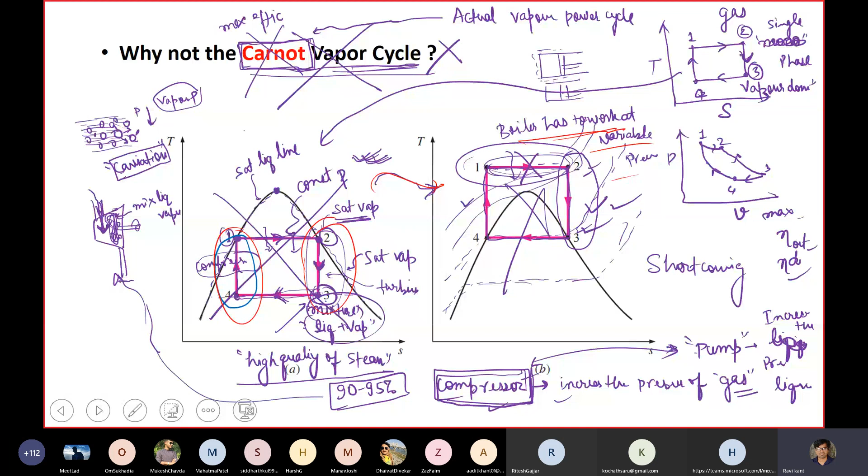So that's why we have left out the Carnot vapor cycle; it is not possible. It's not a real cycle that would be possible. So then we have come across that the ideal Rankine cycle would be the best solution to get the power output. And the only difference we saw from the gas power cycle is there is a substitution of the compressor with pumps.

Okay, one more thing: in the gas power cycle the compressor shaft is connected to the turbine shaft, and some of the power you are getting from the turbine shaft will be delivered back to run the compressor. So the back work ratio was quite high. In this case it was around 40 to 80%. In some cases 80% also we used to get.

But here we'll see, instead of this compressor, there are the usual heat exchanger, turbine, and then condenser. All sorts of things were there. So except this compressor, we have pumps now, and here slight work can also be used to run this pump as well. But here we will see that the back work ratio.

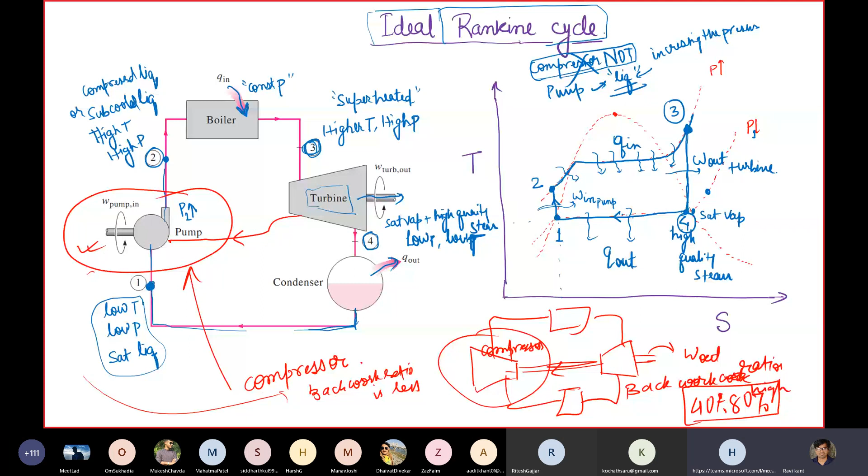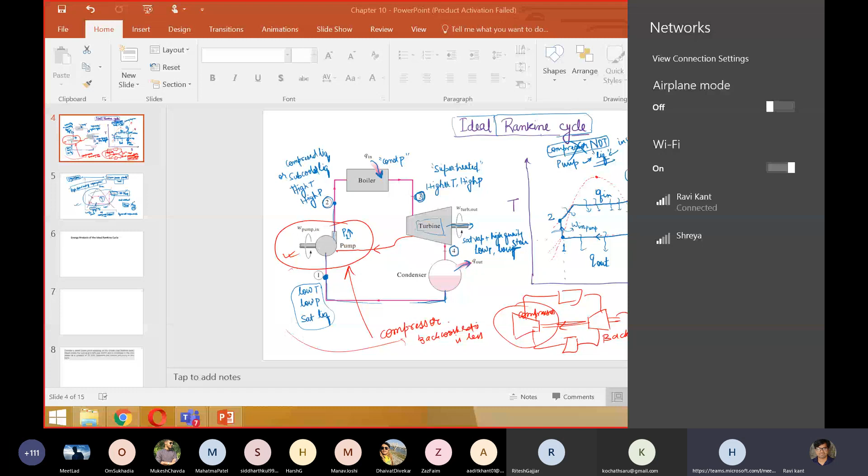Yes, just try to. Voice is breaking. Voice is breaking. Okay, yes, that is the problem. Okay. My voice is. Internet is okay. Is it from your end? Because from my end it's okay. Who is this? Probably it's from your end, because others didn't complain. David, audible enough, or is the voice cutting? Sir, you are audible, but this Microsoft Teams person is constantly getting unmuted, so the sound is getting disturbed. Okay. So I'll try to tell him. Okay, who is this guy? There is someone who has pasted a link. I can see that.

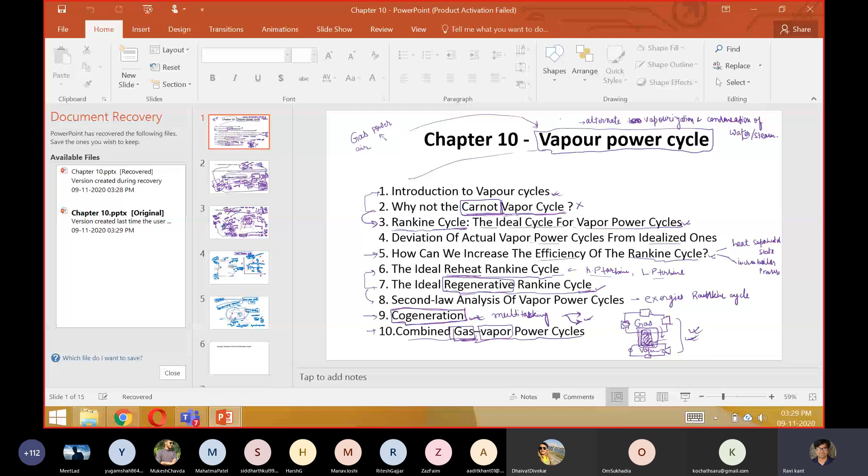Okay, somebody is in the lobby. Let me put them in. Okay, my Microsoft has stopped. The reason these lobbies are here is because the D2 students don't have PDP emails. So we will be facing some problem admitting them from the lobby to the meeting till they get their usual PDP email. Let's see. Let me open that. Okay, fine.

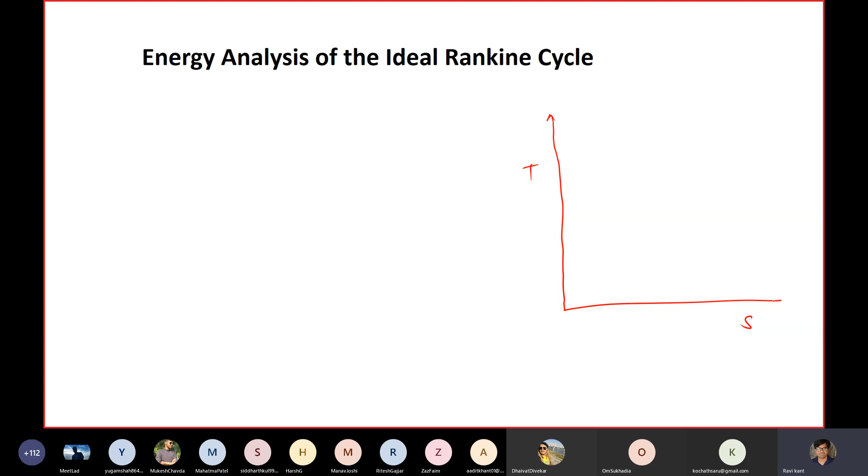So this is your TS plot. I'll draw it quickly because we know things. So this is our saturated. Somebody is calling me. 1 second. Hello.

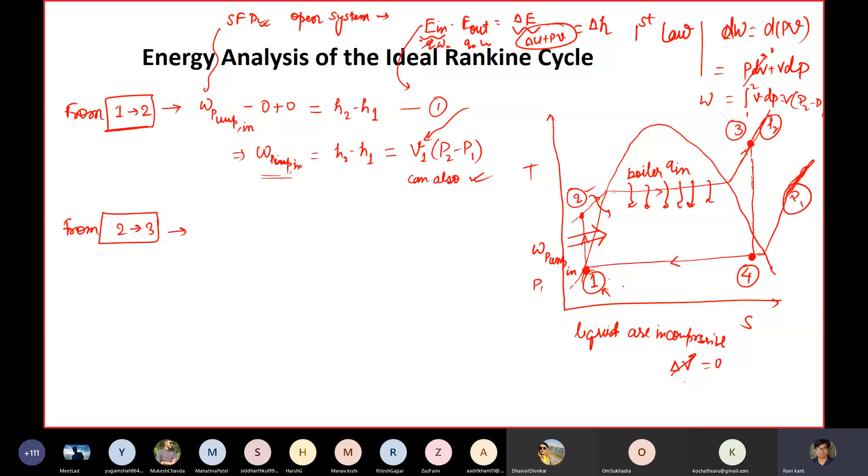One more thing, this V1, what is this V1? Can I write what V1 is? This V1 is essentially state 1's volume, specific volume. And what would it be? This is the specific volume of saturated liquid, which can be sought from the table.

Someone is in the lobby.

This is the problem, you need to keep on editing. So I have to give one guy, someone from you, the right to manage those lobby guys. At the end of this class, I will choose one person who can handle these guys. It's just a matter of trust.

So from 2 to 3, we can see that there is no work interaction happening from the boiler. So the work interaction is 0 here. So a similar equation we can write over here. Q in is equal to final minus initial, so H3 minus H2, whatever the enthalpy over here. So this is your Q in, this is your W in. Okay, these two things you got.

Now let's see what's happening from 3 to 4. You get the turbine work out of it. Since this is isentropic, we have already seen that isentropic processes work adiabatically, so heat transfer Q is 0 along this. So in one shot I can write W turbine out is nothing but final minus initial, that is H4 minus H3. Yes, done.

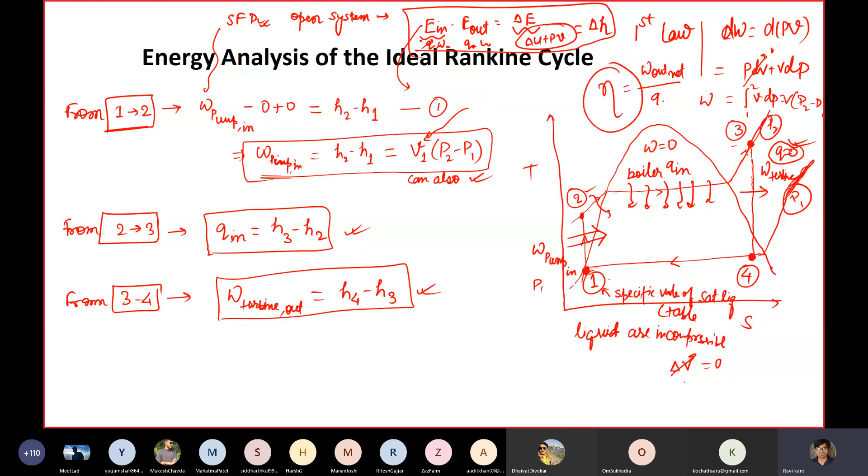From 4 to 1 again. So 4 to 1 is the condenser pressure. This P1 is condenser pressure and P2 is boiler pressure, this is what it is technically called. So this particular constant pressure line is the condenser pressure, it is called. So heat is getting out of this system. This is Q out.

Since heat is getting out of the system, I will write minus Q out is equal to final minus initial. So final is H1 minus H4. In better form, I can write Q out is equal to H4 minus H1.

Keeping these things in hand, now I would be able to seek the efficiency of the plant. What could be my efficiency? Eta of steam power plant. I can write away.

Steam plant efficiency is equal to W net out divided by Q in. So W net out is what? There are two ways you can actually deduce your efficiency. You can use this formula or you can also use this formula.

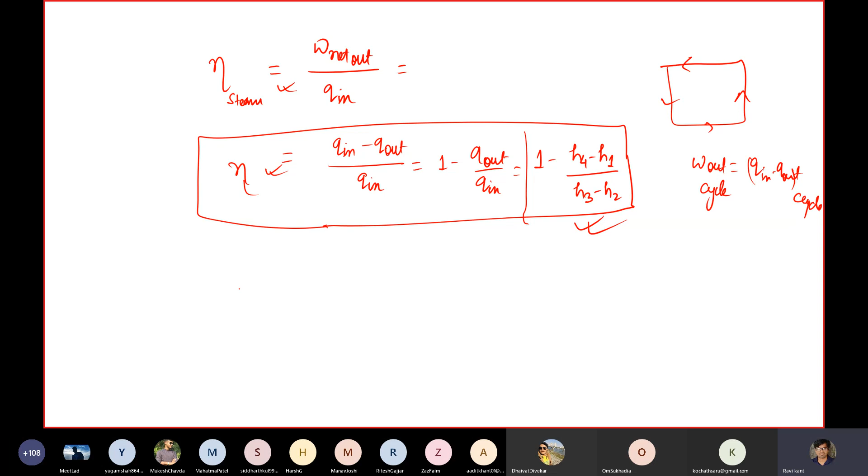Yes, you can write this particular formula. Workout is same. Obviously both lead to the same answer, but this is another way to analyze the system. So work net out is nothing but work turbine out minus work pump in, divided by Q in. Turbine out was what?

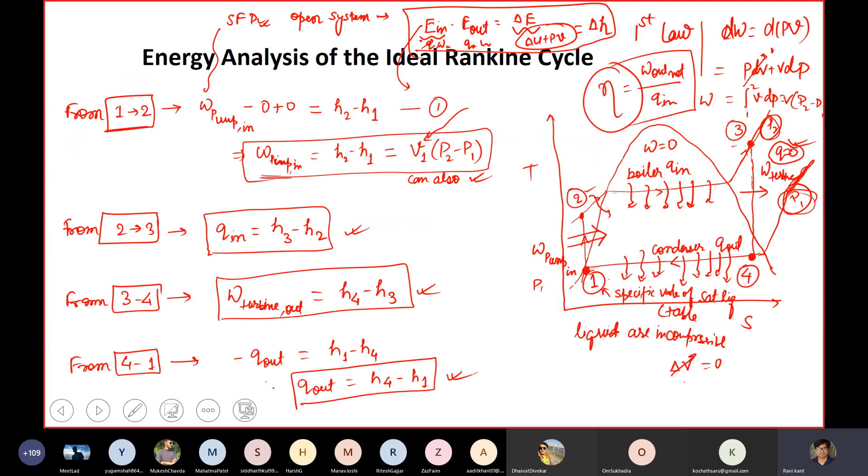Turbine out was H4 minus H3, minus pump in. Either you can use 2 minus 1 or this formula, both you can write.

Let's suppose I want to write anything, you can write. So I want to write V1, P2 minus P1. It's my understanding, I want to write this. Also that would lead to the same answer. And this Q in is H3 minus H2. This also you can write. Or you can write 1 minus H4 minus H1 by H3 minus H2.

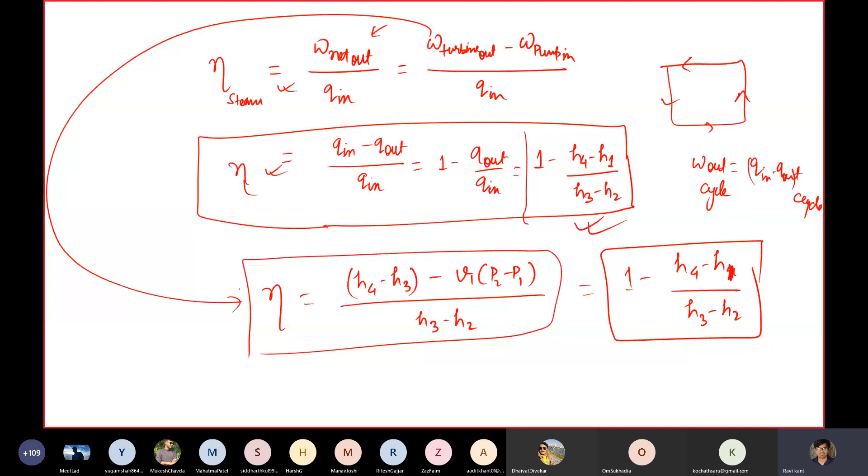Since there are no compression ratios or pressure ratios here, this formula is a bit easy for you to comprehend. This is easy.

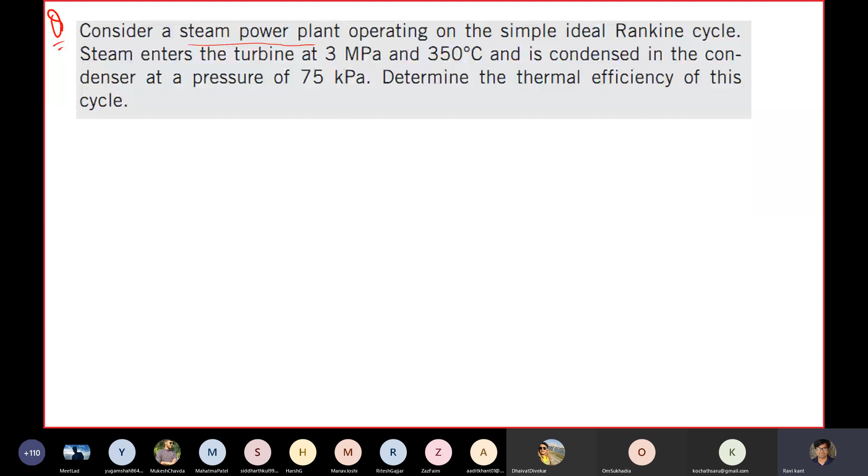Let's take a quick example in this manner. Consider a steam power plant. This is the time, 3:54 already. Consider a steam power plant operating on simple ideal Rankine cycle. Steam enters the turbine at 3 megapascal and 350 degrees C, is condensed in the condenser at pressure 75 kilopascal. Determine the thermal efficiency of the cycle. We'll take up this, we'll not forget this. We'll take up this example in next class.

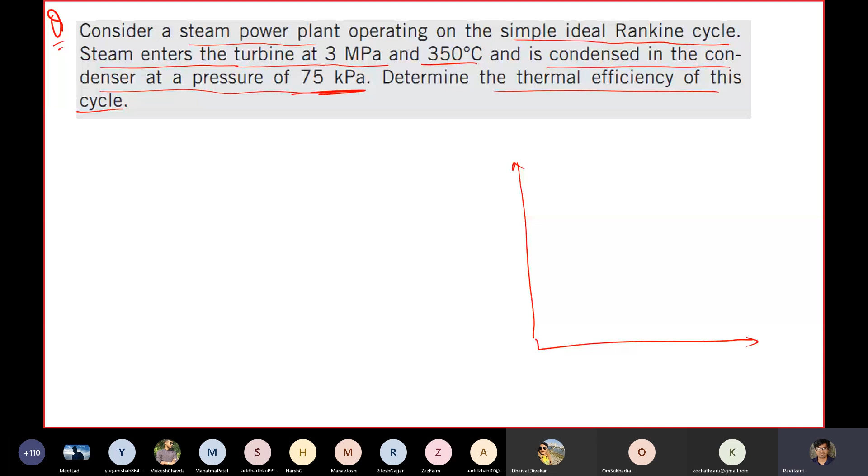But let me draw the TS diagram for this. Then we'll leave, but we'll not leave this question as it is. We'll definitely work this out. This is T, this is S, this is your saturation liquid and vapor lines. These are your two pressures: condenser pressure line, and this is your boiler pressure line. So let's suppose this is my P1 and this is my P2. This is my 1. I'm going from 1 to 2, 2 to 3, 3 to 4, and 1 again.

The steam enters the turbine at 3 megapascal. So enters the turbine at 3 megapascal means, this is your state. It is talking about this state. So essentially P2 is given as 3 megapascal. Since your turbine starts from 3 at 350 degrees C, this temperature is particularly given as T is equal to 350 degrees C. This is what it is.

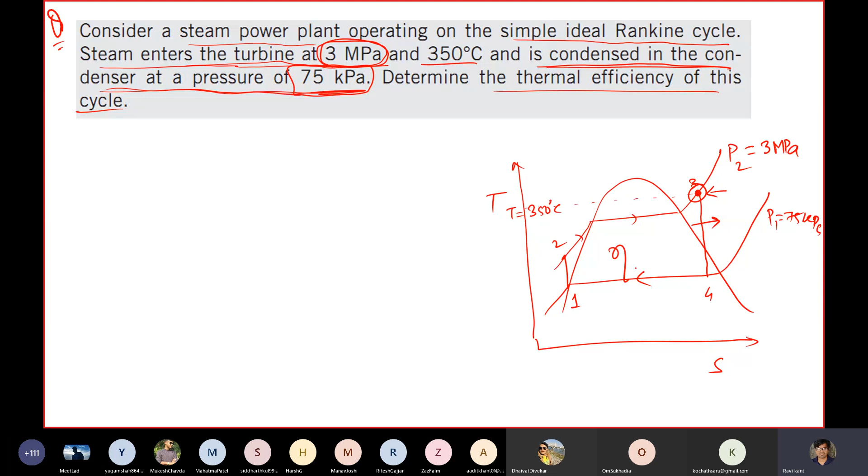The information given is condensed in the condenser at pressure 75 kilopascal. So condenser pressure P1 is given as 75 kilopascal. Determine the thermal efficiency of the cycle, we need to deduce this. So those who have understood what process we have gone through, you can actually apply here and you can see. You have to take help from the property table.

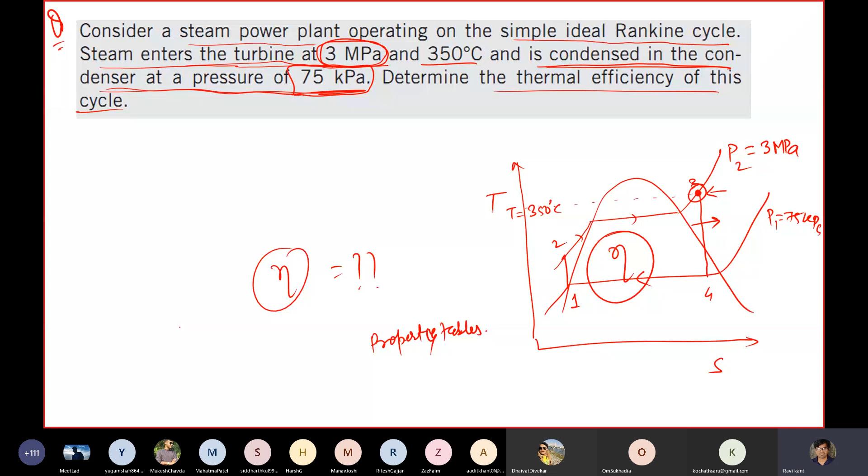Okay, nonetheless, I will also do this example. I will not leave this in the next class. Okay, any question so far?

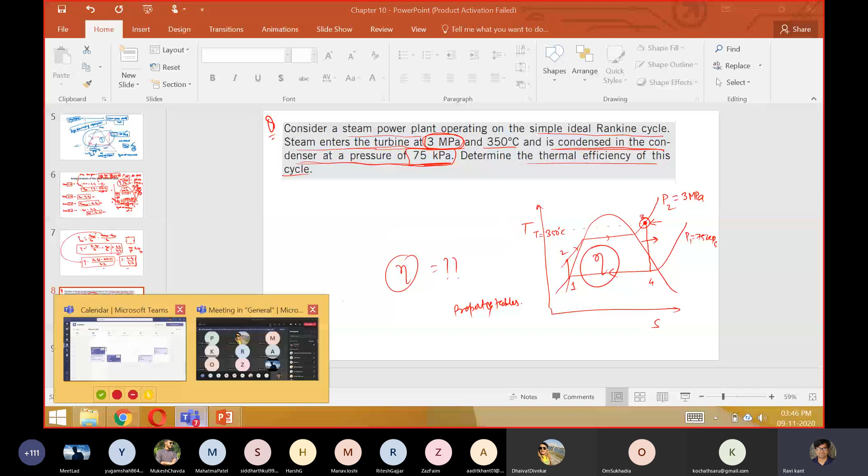So I would expect more, I mean, lots of questions from D2D students, but I would tell that be patient and try to start with the basics first, and then we'll catch up these things later. But try to understand this, and I also expect that you guys also have done something in your diplomas also. So okay, any question?

No, sir. No, sir. Okay. Sir, today's lab is cancelled.